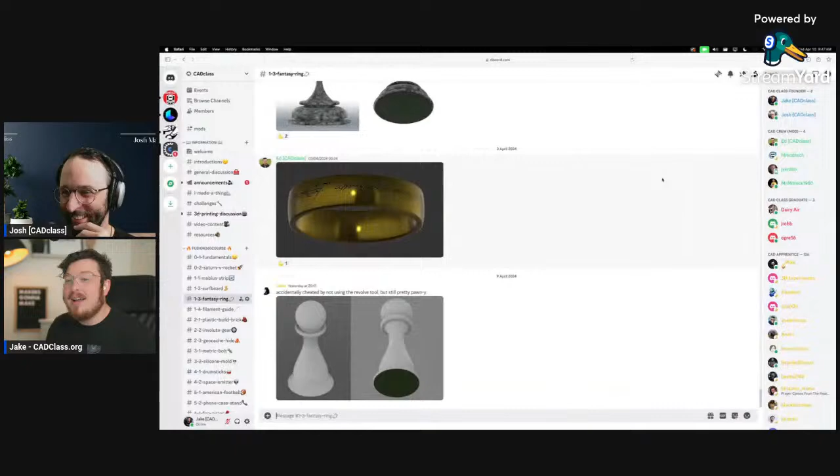Alright, let's show off some of the rad projects on the 'I Made A Thing' channel. Oh yeah, where were we last week? So I think after we got everyone making the twisty bit, then we got ZDP, who's a very fantastic CAD designer using Tinkercad. Looks phenomenal, working on it, and then getting into the threads.

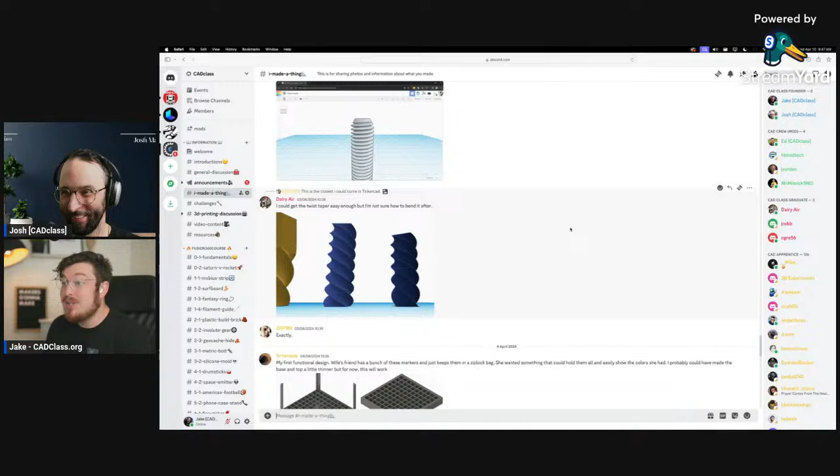Threads are not easy - they're weirdly difficult things to do. And that's definitely in Tinkercad, which makes it even more impressive. That's a tricky thing.

This Dr. Venable - is that person part of our new innovation group? I don't know. What does it say? 'My very first design - wife's friend has a bunch of these markers and keeps them in a Ziploc. She wanted something that could hold them all easily to show all the colors that they have. Possibly could have made the base and top a little thinner, but for now it works.' This is very cool, that's rad.

This is reminding me - my partner used to work in a COVID laboratory, and they had something very similar to this for holding test tubes, and it was 3D printed. I asked who 3D printed it and they couldn't remember. I thought that was pretty rad because the tubes are already sealed, so there's no hygiene issue. But the previous rack they bought was just aluminum, not even stainless steel, and it cost something obscene like $800 for essentially just a grid rack.

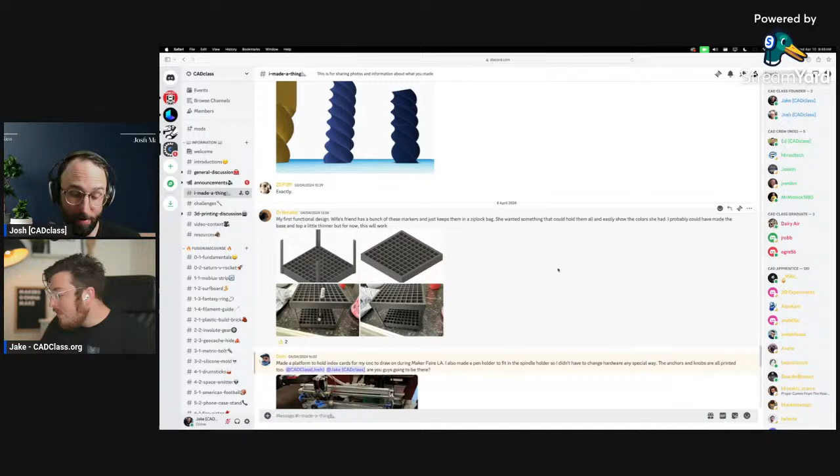The bio companies have a stronghold on the purchasing departments of these institutions - I know you have a lot of experience with it. Such a racket, right? Especially those test tube holders - why the hell is this thing multiple hundreds of dollars? This is 10 cents of plastic and one injection mold. Kudos to businesses like BioRad, a big distributor of equipment - their margins must be insane. They figured out how to get into institutions and completely overcharge by a factor of 100.

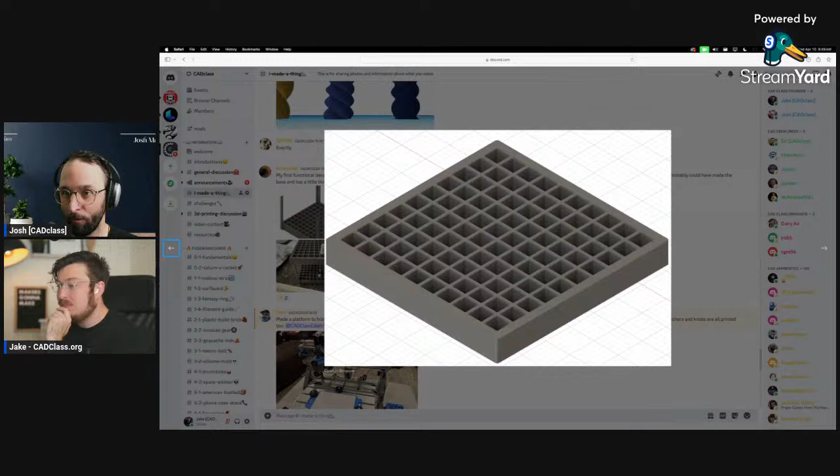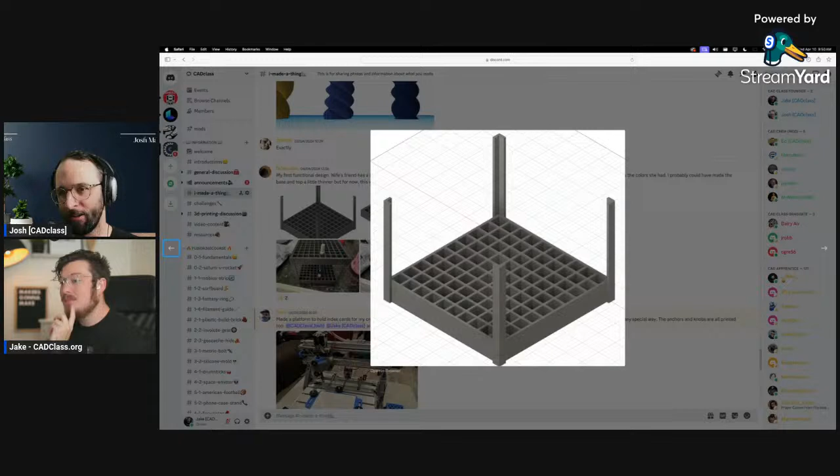A lot of times there's pressure to spend your grant money, and if you don't spend it, it ends up reflecting negatively on you. So there's this weird pressure where people feel like they have to buy something, leading to wasteful overspend in a lot of cases. Not necessarily true of the COVID lab though - obviously they're trying to make a profit there.

I always thought test tube holders were one of the low hanging fruits for 3D printing, and honestly there's a lot of big business to be had working alongside researchers. There's a lot of customized equipment that people need over and over again - stuff where you could reduce the cost by 10, 100, maybe even 1,000-fold in some instances. If anybody here is looking for a market to pay attention to, I'd say the bio market is really interesting.

But coming back to it - rad project, very very nice print as well. Lovely, lovely, lovely. But what I'm noticing - I don't know if you guys can see on the screen...

This has got a little bit of a speckly surface quality on it. That's the actual surface of the print bed, and when you pull it off and put it upside down, that texture is now on the top. That's why I see a lot of people asking how to get a lovely smooth surface on the top of their print. A quick fix is to print it upside down, so where it's touching the bed becomes the top surface. It ends up really lovely and smooth, or very uniformly gritted, which looks neat and professional, to the point where you can't even tell it's 3D printed. Good little trick, rad print.

Love to see it. This looks like an even bigger project. A platform made to hold index cards, so a CNC can draw on them during Maker Faire. Also made a pen holder.

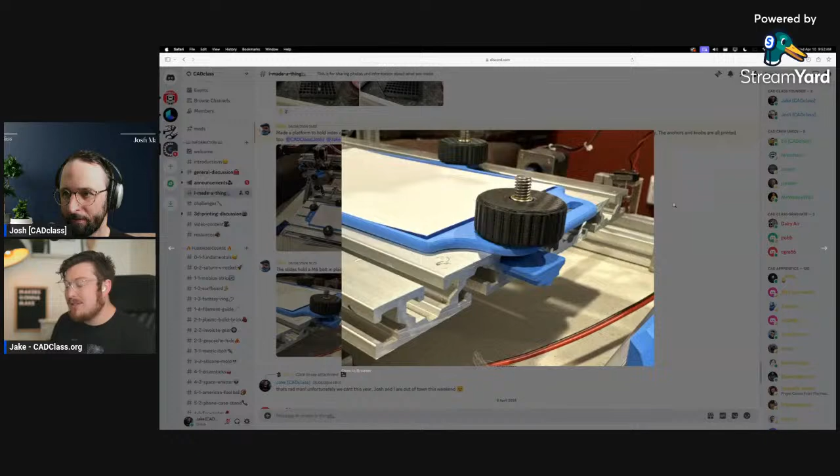Making little holders for index cards that you can then print, and that actually looks almost like a laser pen. Funky, but what a rad little project - just taking a machine that already exists, making a couple 3D printed fixtures for it, and turning it into a completely different tool. That's really cool.

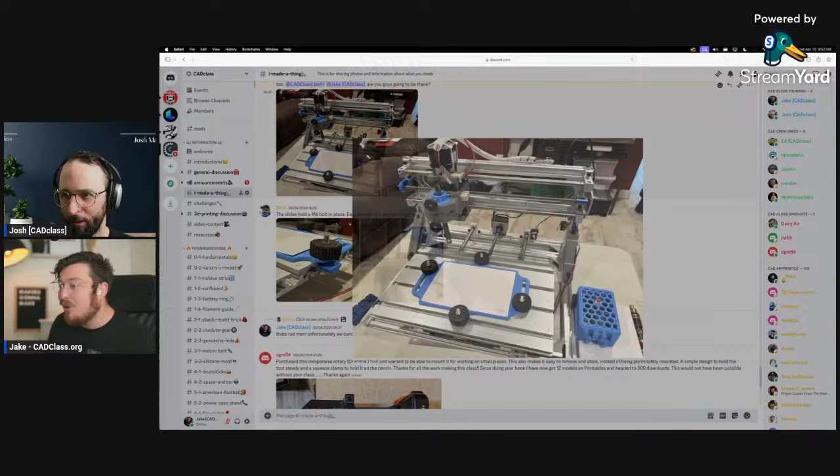That is so awesome. I also really dig this little box on the right hand side because it's got an ominous red button. I feel like every mechanical thing needs to have an ominous red button. It's still one of my projects, I will get around to it one day.

I have this comically ridiculous, big scary red button that you just get to hit. I've wanted this since I was a child watching old Batman shows, where there's a person with a hidden cave behind a bookcase, a marble bust, and they tip the head back and there's a button - hit it and the bookcase opens. I've wanted that since I was a boy. I have marble PLA, I have the button, and it's been on my growing list of projects since I was this tall, so I'll get to it eventually. If you guys have any suggestions for who the bust should be of, post it in the comments and I'll try to make it.

I found this model of Darwin's bust - he's got a lovely, massive, gorgeous beard that I can use to hide the seam when you tip the head back and click the button. So something like that.

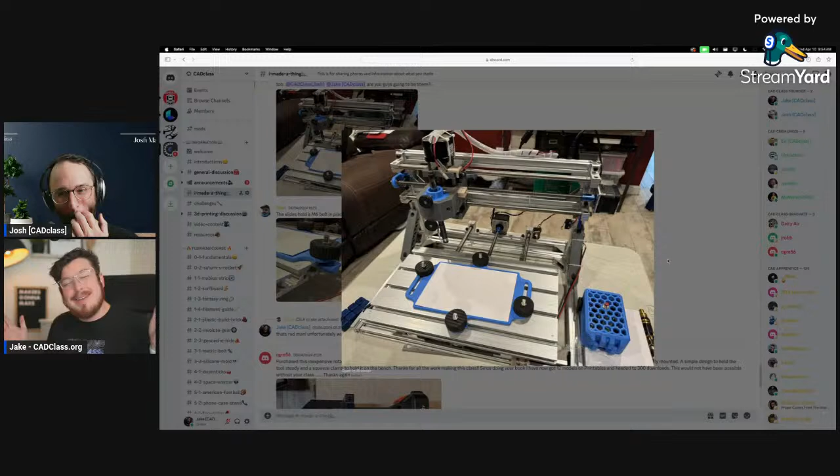But coming back, awesome project coming from Ogre - purchased a very inexpensive rotary tool and wanted to be able to mount it onto small working pieces. Dremels are super handy, but working on tiny projects is scary. It also makes it easy to remove and store - a simple design that clamps onto the device.

That is so cool, super awesome, I super love that so much. Ellereth says the bust should be of Josh.

I know, but I feel like if I have a marble bust of Josh, I'd think Josh is dead. No, he's not.

I just get like really bummed out all the time. Yeah, rad, super awesome. These are not hard, by the way.

I know people look at this and go, oh yeah, it's just like a little holder and a little saddle and bumps. The weird, intricate design of a lot of tools is so much more difficult than people expect.

Yeah, the trying to measure contours around weird tapering cylinders with grips in different areas so you can never get a real diameter, way harder than it looks. I've got a lot of experience with that and it's a nightmare.

And even the little design features that'll have ridges and bumps and grips, you don't recognize when you're looking at products just how much of that product is like a specialty feature. And when you're modeling your own simple stuff, you're like, look at this, it's all smooth and flat surfaces and nice curves, and they're like, why doesn't it look like a final product?

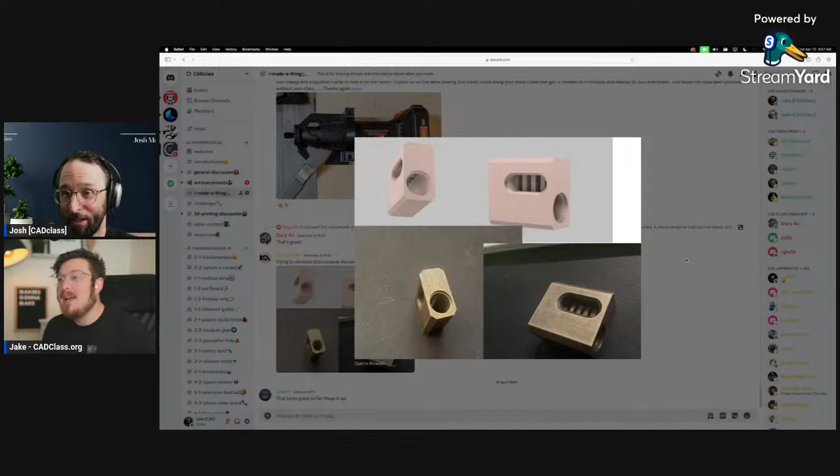And I'll just add on to that. When we talk about people in the professional manufacturing space that are actually doing 3D designing and 3D modeling, you can kind of put it into two separate categories that I see all the time in job listings. You've got CAD technicians and CAD engineers. Usually CAD technicians are paid significantly less than CAD engineers, and you'll hear CAD technicians being called things like CAD monkeys, where it's like, give them something and they just make it and it comes back done really quickly. But the defining difference between the two is that the engineer actually has information about the manufacturing and how it can be improved and changed, if it's a prototype where it might go wrong, how they can prepare for that, and if it does go wrong, how they can fix it. So they have significantly more hands-on manufacturing background with whatever they're designing.

Whereas if you give it to a CAD technician, they may not know everything about plastic injection molding or CNCing steel versus CNCing aluminum with your design. If you're designing a CNC cup, for example, and the CAD technician made it with sharp internal corners, they'll hand that off to a machinist, and the machinist will say this literally cannot be made how you think it could be made. But the CAD engineer will go, oh, I actually need rounded fillets on the vertical.

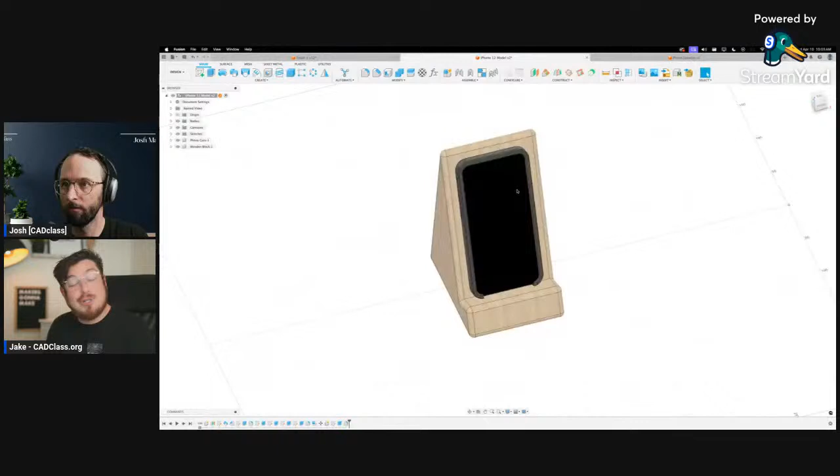What I believe they're having trouble with is they're in the wrong perspective. So we wanted to take some time and go over this specific part of the project, which is one of the best things about doing this podcast - responding may not be the best way to translate the information, it gets a little confusing. So doing it live to show you guys the actual process makes life a ton easier.

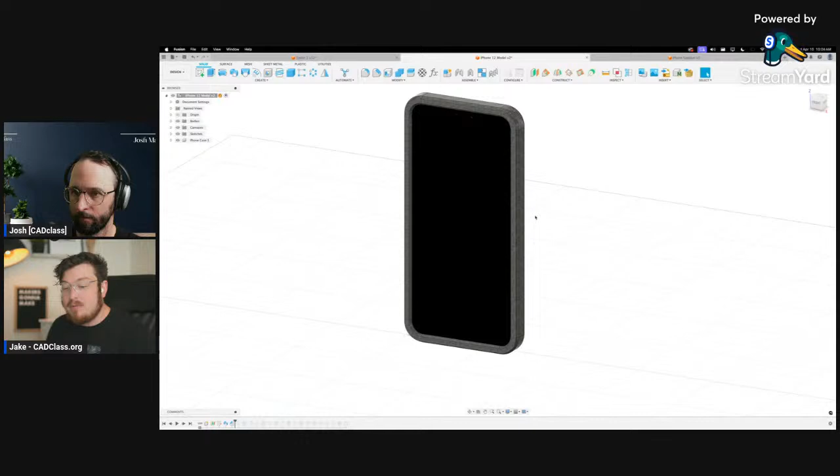This is the final project where we have a smartphone with no brand name, with a case on it and then a wooden phone stand. But going through all of this, we want to start fairly simple. The idea with starting off with a phone and then making just this bumper case around it is that you can make the profile of this outer case as an offset from this outer surface of the phone, then use any of the lines that wrap all the way around the phone as a path to sweep that profile.

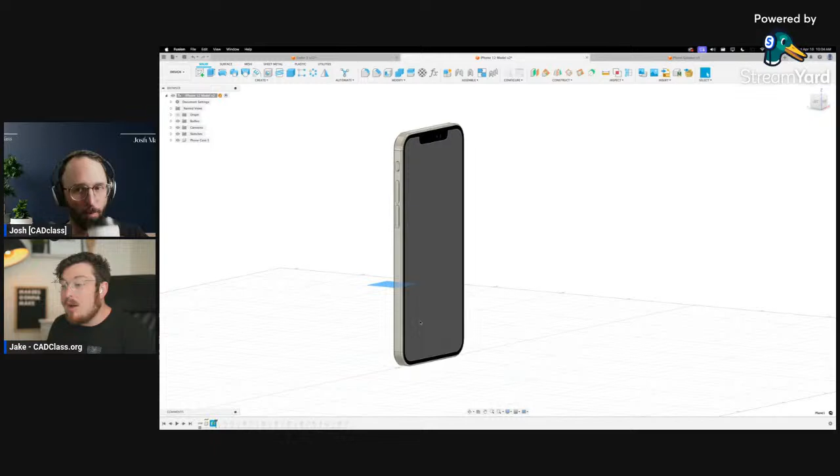So we wanted to go through this pretty quickly and show you guys all the processes that go into it. If you want to follow along, this is on page 148 of the book. You start off by making an offset profile that is 50 millimeters up.

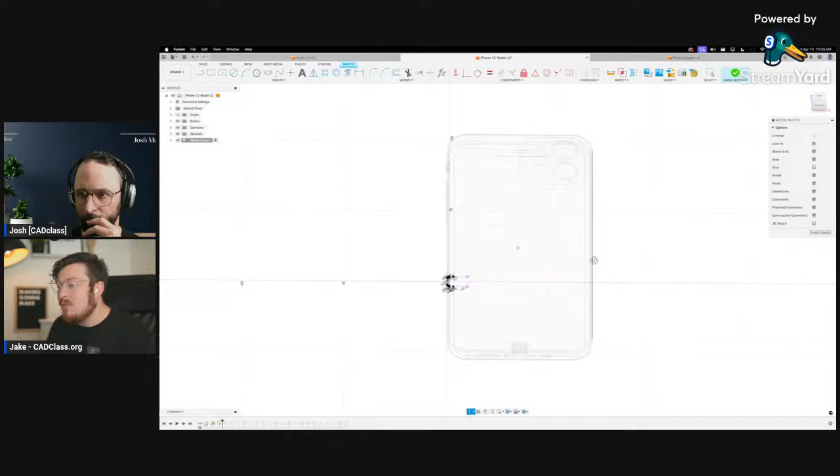The majority of the difficulty I think TC is getting stuck on is the sketch portion. The idea is that you just want to be projecting the 8 surfaces or the 8 points of this phone. I think what they may have had trouble with is that they had the front perspective where there's no angles, which can be a little confusing. But in the top section you do want to project the 8 lines - 1, 2, 3, 4, 5, 6, 7, 8, or 9 lines, but 8 points.

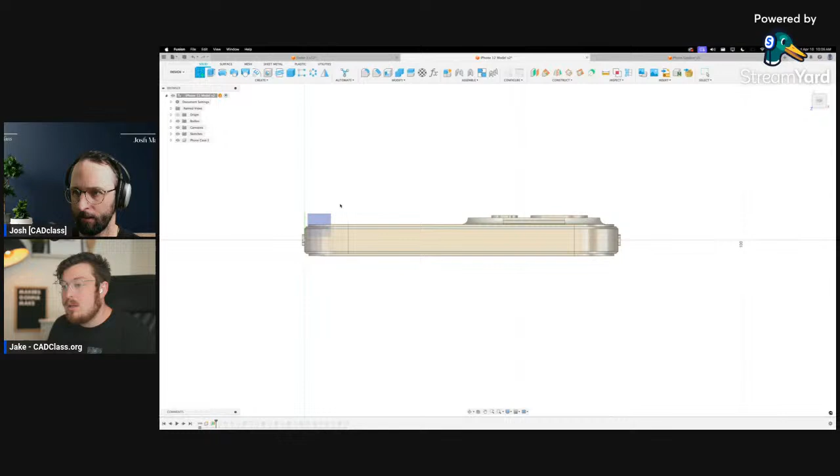Then you can make an offset, which you can see right here in blue. I'll actually redo this, to be honest, it makes it a little easier to see what's going on. So I'll do it from scratch - we'll make that new offset plane from the top surface.

This wants to be up 50 mil. Then I want to make a new sketch on that plane, and I'd like to project these points. You can see that top corner - what was it letting me select there? That's fine, I can just select that line, that'll give me the endpoint all the way around.

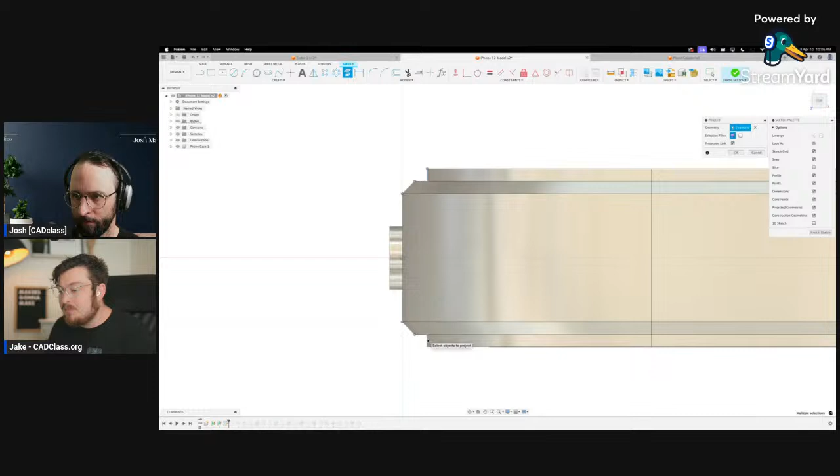There we go. I also want to be clicking the top and bottom as well, just so I can get that nice little offset. Right now these are purely just points on our project. So now we want to use our line tool to actually join all of these, so we have very defined lines between the two. Whoops, messed that one up.

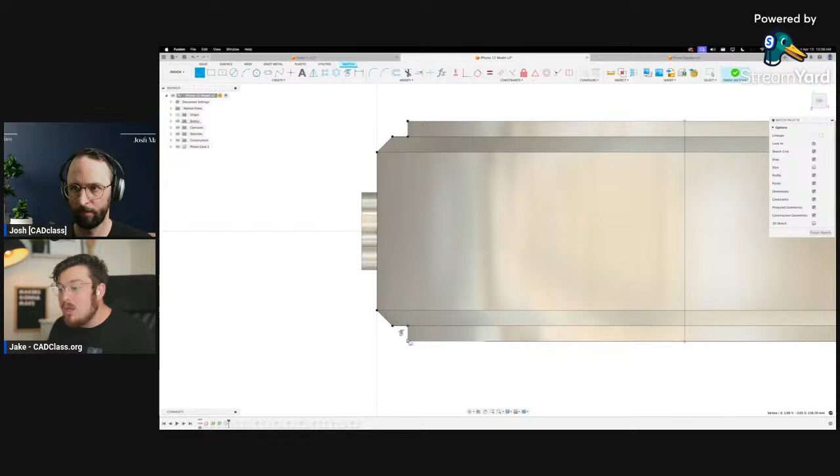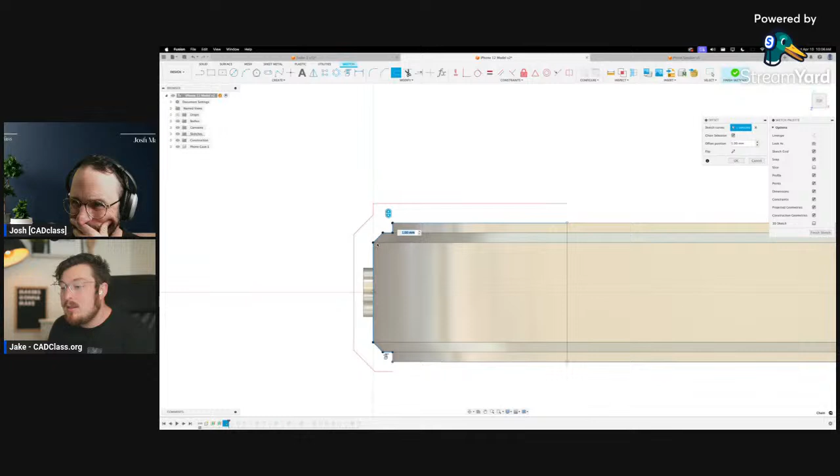The real difficulty with this is not so much doing the project, it's actually seeing what you are doing, which can definitely be a tricky part of CAD, where you kind of get what you're doing, but it's a little hard to see, and you just kind of trust the process. As soon as I have all my lines that encase the side of our phone, we can type O for offset, and select all of these lines that wrap all the way around our project.

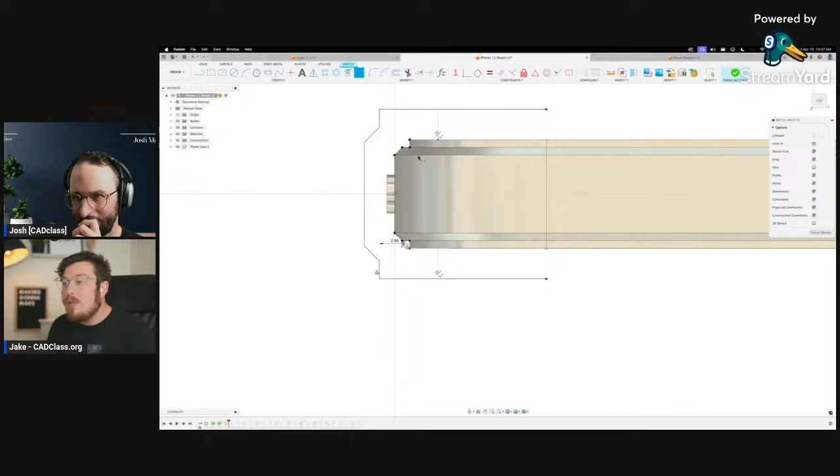You can see it's actually going inwards, so I'm going to click flip down here, or I can type in -2. Then you can see it punches out a little bit. I can click OK, and then use my line tool to make some vertical lines to cut these off. Those two lines want to be collinear, so they extend into each other - that's pretty simple, that's just a constraint. The whole thing is set with a 2 millimeter offset, so I'll do the same thing.

Say 2 millimeters from that point to that line. There we go. If you can see, this inside profile is actually the same color as the white outside, so there is no enclosed profile right now, because one of the endpoints of this line is white, meaning it's movable.

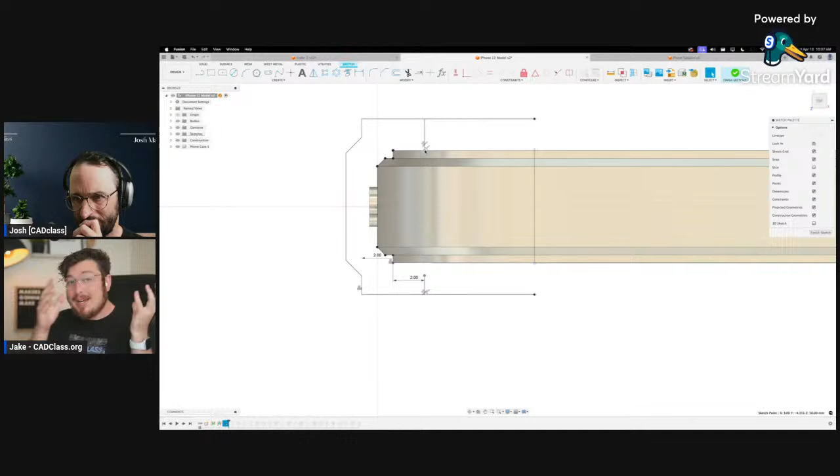There was an ever so slight gap between that point and that point. On top you can see black points, because it's actually coincident. So we can click on the coincident tool, click on the white dot, click on that projected line, and now it's connected.

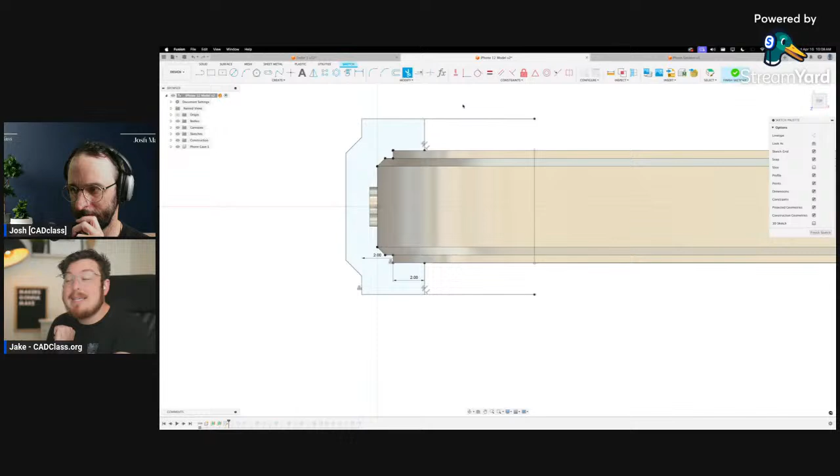Now I have an entire enclosed profile to work with. You don't necessarily need to, since you already have an enclosed profile, but you can trim away this top line and this bottom line. Click the trim tool, or type T, then click and drag. It works just like the eraser tool.

As soon as you do this, the neatness of the project kind of disappears, because now all of those offsets are individual dimensions instead of the entire thing being offset, since we've carved off some information. But that still leaves us with this enclosed profile, which is completely fine.

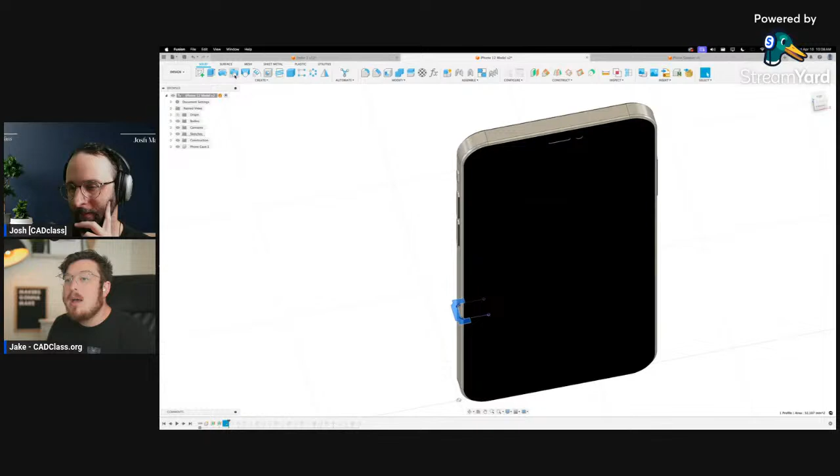Then I can finish that sketch and go into the sweep tool. That profile is already selected, and then I click on the path — I can click any of these lines that follow the route of the phone. It doesn't really matter; you can pass it all the way around.

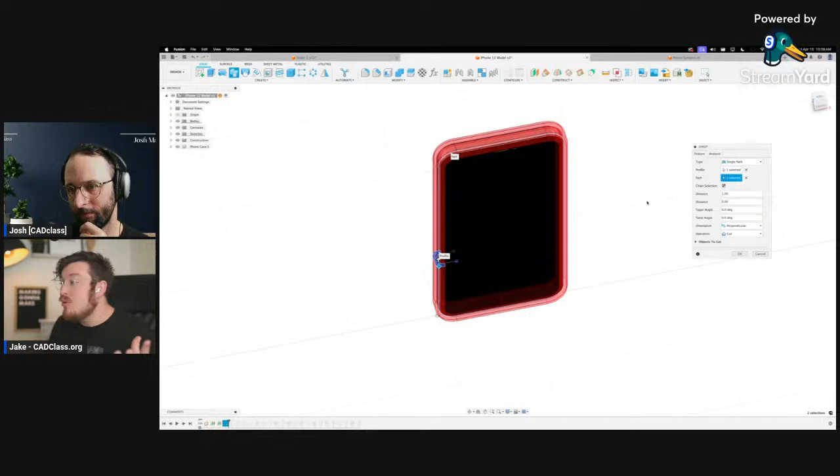You can see it's red because it's intersecting with our phone at some point, but we don't want to cut away this — we want to make it a new project. So in the operation, instead of cut, we can say new body or new component. It doesn't really matter which.

The rest of the project is going to be about seeing where the buttons, the switches, charging, and everything like that interfere with this outer body. So then you can cut that away, make the backing of the phone case, and then it's done.

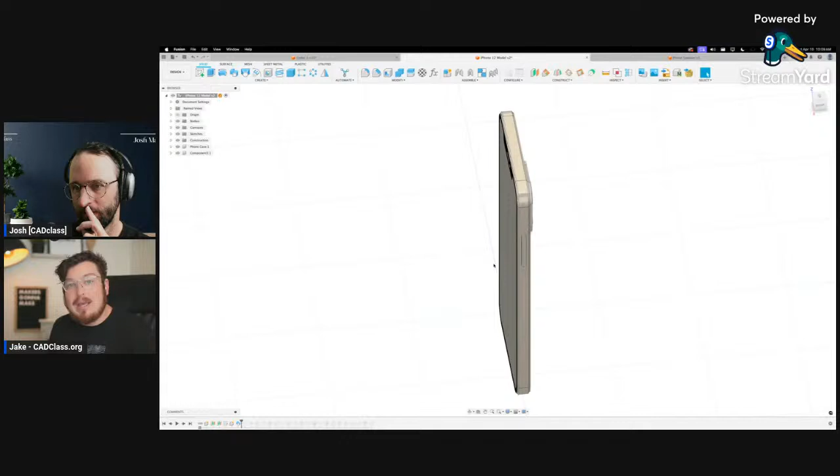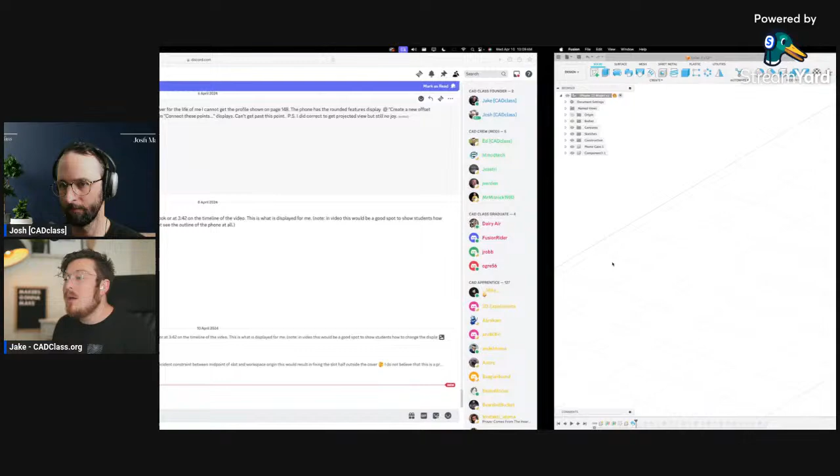But this is a really good project. I actually fairly like this, because part of the ethos is — yes, you can download this phone off the website, but it's a little bit unnecessary, because we want this to be an example of how you actually make your own phone from scratch. Any smartphone you have, some of the dimensions are guaranteed to be available online.

You can look up any smartphone at all, and it will give you pretty accurate dimensions — the thickness, the radius, where the charging port is, how large the charging port is. All this information is super duper readily accessible.

So if you've done the project just by downloading the phone, that's great, but we do highly recommend you try to recreate your own phone from scratch and then make a case for it. You can follow almost identically the exact same steps in the book and just apply them to your project. There you go, great.

Hope that helps. PC Van Fleet asks a quick Fusion question: when clicking on things and using constraints, is there an order in the clicking as to what gets constrained to what? Sometimes — really good question.

For example, if I have two lines like that and I'm using the parallel constraint tool, one way is to click on the parallel constraint tool — it expects you to click two objects, so you click both lines and they become parallel. The other way is to hold down Control or Command and click both lines so they're both highlighted, then click the parallel constraint. You can do it either way, but there are a couple of constraints where the order of operation is really important.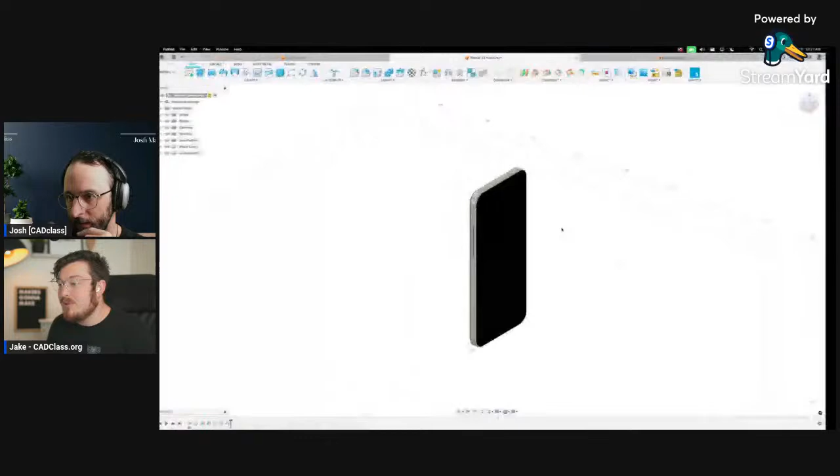Weirdly enough, I've flown a lot in my life, but I've never flown in a prop plane. I got the opportunity to do that last year for the first time. Yeah, you did it in Alaska, didn't you? That was rad, lucky bastard. They just flew us out to the middle of nowhere, and then we went fishing, as you do in Alaska. It's crazy. That was crazy.

That's awesome. Yeah, so the SawStop - so there's something interesting in the maker world going on right now. There's legislation, for everyone that doesn't know. There is what a SawStop is. So SawStop, for those of you who don't know, table saws are notoriously dangerous, extremely dangerous.